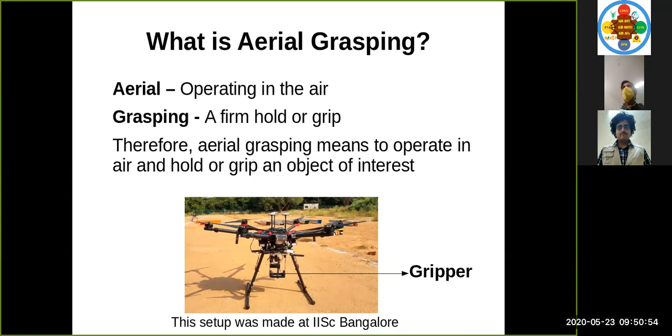Aerial grasping is like a pesticide application in case of agriculture. This is a setup which you can see at the bottom, which was made at IISc Bangalore, where a gripper has been set up below a drone. This setup is used to take up a flying object. It used to fly and pick up a brick and place it at a different place.

So, the need for aerial grasping: it can be applied in many different fields such as agriculture, construction, installation of equipment, search and rescue, inspection and maintenance. In today's session, I'll be focusing more on agriculture because you are all from an agriculture background, but I will also touch upon construction, installation of equipment, search and rescue, inspection and maintenance briefly. I'll focus in detail about agriculture.

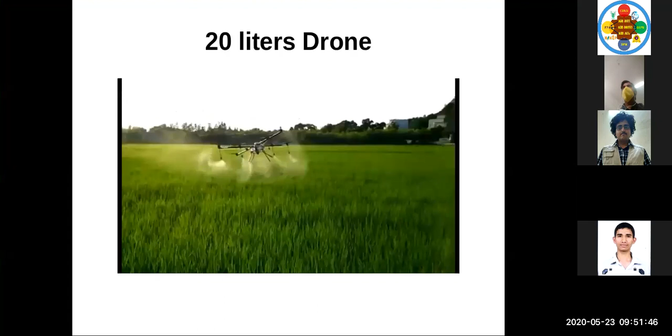So here is a 20-liter capacity drone which carries a 20-liter payload and has a takeoff load of 43 kg. It is flying over a field and it sprays the pesticide.

This is being used by farmers. It will play a very important role in their farming activity. So instead of going and doing it manually, which requires a lot of health hazards to the farmers, this can be done using a drone.

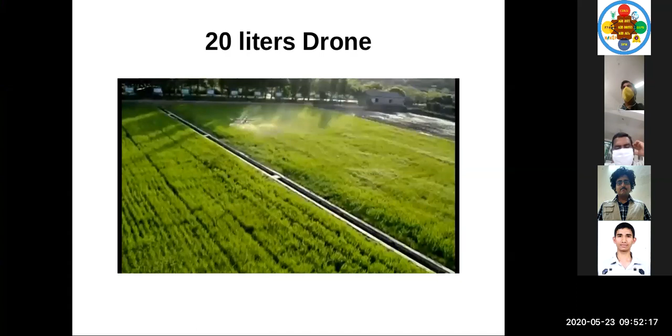Using 20 liters of pesticide, the farmer can go over the field and spray for almost 3 to 4 acres. It can also be efficiently used for more area if planned properly. So this is a pesticide drone which is used for spraying pesticides.

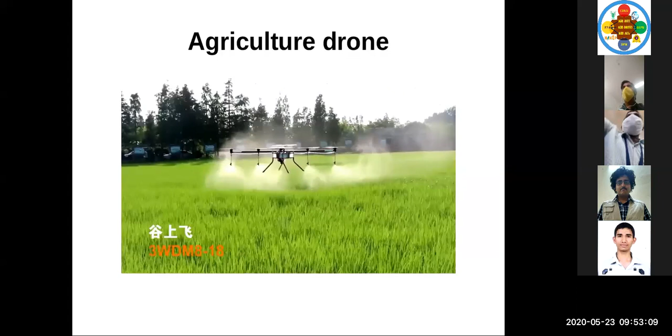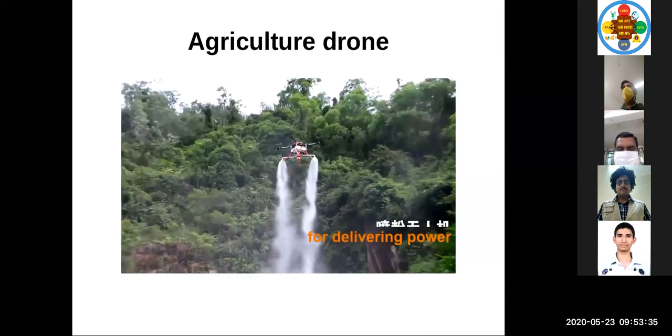You can see the distance it maintains from the crops. This can be done manually, or it can be done using automated purpose. If you are going to go for automated purpose, you need to use GPS and other global positioning system assistance so that you can make it autonomous. You need to map the field where you need to spray the pesticide so that you can spray within that area. You can see the height from which the pesticide is being sprayed.

Here it is being used to cut the weed. It can also be used to cut weeds in the soil. Here a person is operating it. It is being done manually in the tea garden.

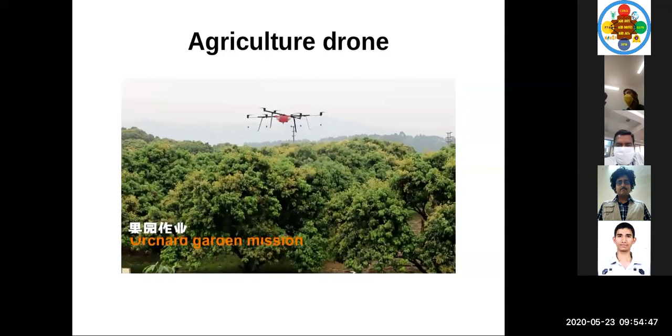So it is not a quadcopter, it's a hexacopter. It has 6 rotating propellers with it. A quadcopter is nothing but which has 4 rotating propellers with it. If you're going to go for agriculture drones, you need to use a hexacopter. It should have 6 rotating propellers so that it is efficient enough to carry more payload and fly for a very long time. Using quadcopters is not advisable.

So in this case, it is grasping a pesticide cylinder. Here it is going in an orchard garden mission. It is spraying pesticides on the trees.

Now we are going to see an automated fruit picker by FF Robotics. Once the fruit is grown, it is picked by using robots. This is not done by drone, it is done by robotic arms. You can see a computer vision program which identifies the apples, and then a robotic arm is used, going and plucking the apples. You can see it twisting and plucking it like how a human does.

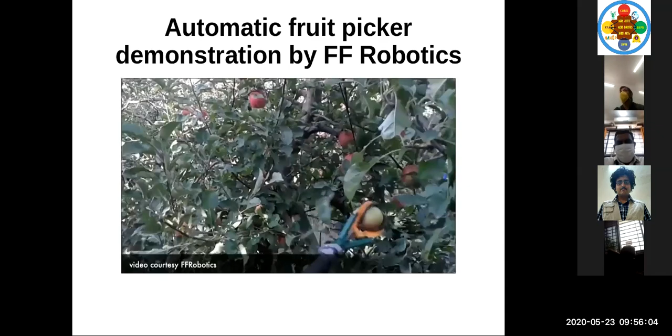Once it is plucked, it is taken into the vehicle so that it can be processed. The person in the video explains that it can be taken to the farm, and it can be taken away from the farm, and it can be taken directly to the customer's place.

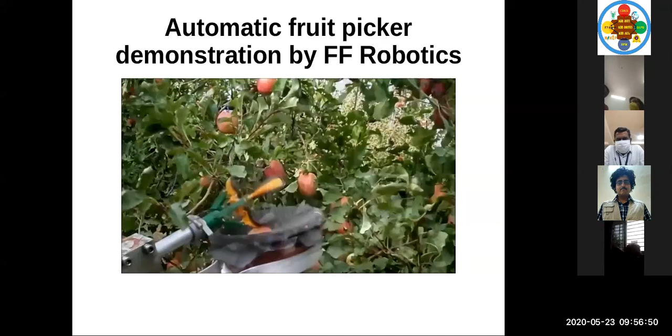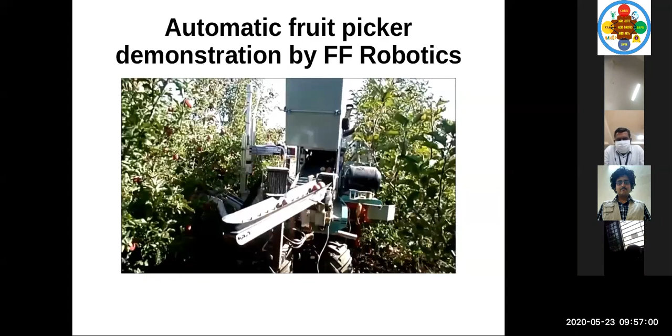So it is a robotic arm which can be fitted to the drone also. It hasn't been done, but you students can focus on this, and you can work on this so that you can use it for plucking apples in the Kashmir region of India. It can also be used to pluck mangoes, even coconuts can also be attempted to be plucked using these kind of grippers attached to the drones.

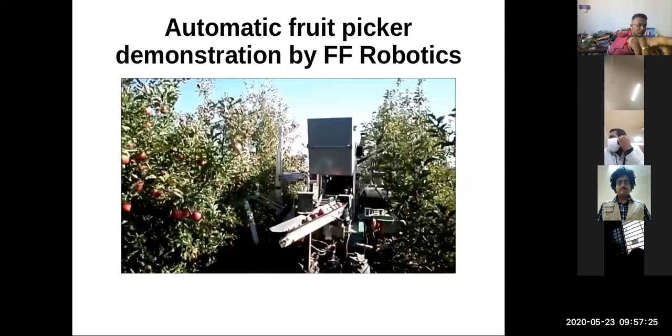Next is DJI. DJI is a company which manufactures drones. This DJI drone, the MG-1P series agriculture drone, can be used effectively in complex environments. It does work efficiently. It can fly up to 30 minutes in the air.

You can see the map in the user operator window. It follows a trajectory which has been given to it before. It can cover up to 6 hectares per hour. If there is an obstacle, it avoids the obstacle and goes around it. It can also be used in nighttime vision mission applications.

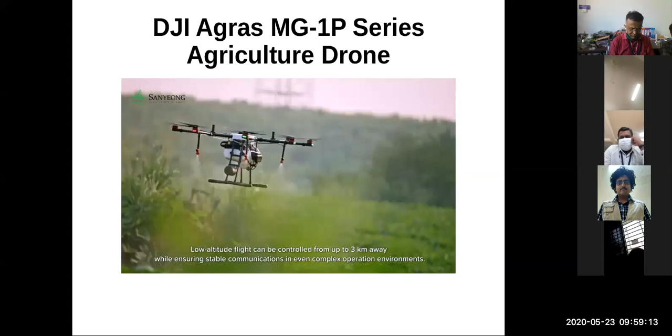The waypoints are set, and then it follows the waypoints so that it goes within the place where the crops are there, and then sprays the pesticides. It has a control range of around 3 kilometers away from where the person controls it. It can be taken in a car, and it can be folded.

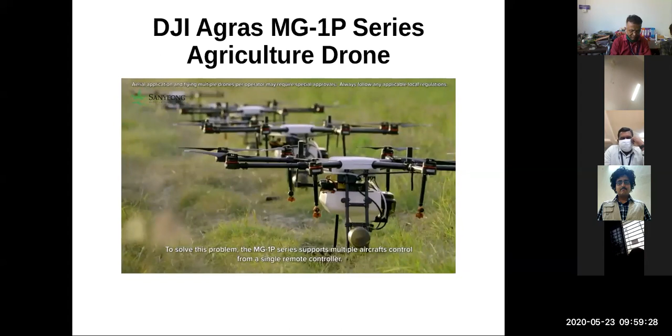Around 5 to 6 DJI drones can be used at the same time using a single pilot. The pilot is the person who operates the drone. A single person can fly 5 drones at the same time and can cover the entire area within a very short period of time. This saves a lot of time.

If the terrain is not smooth, it can find out the terrain and it maintains the height from the terrain. It is IP67 grade material so that it can be cleaned and it is dust proof. Here it is spraying the pesticide.

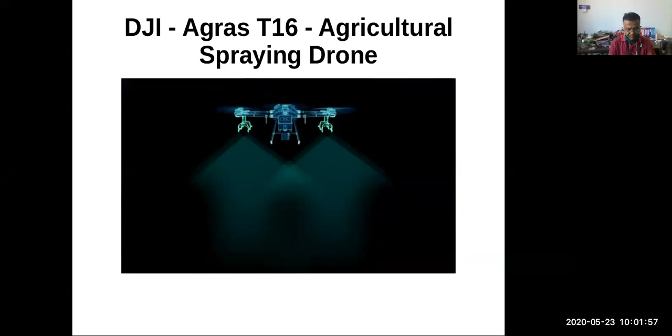It is similar to the previous one, but it has 6 rotors. As I said earlier, these 6 rotors help in giving proper thrust to the flight. It covers an area of 10 hectares per hour.

There is another drone called the Wonder Drone from DJI. These are being used by people in Malaysia for spraying pesticides.

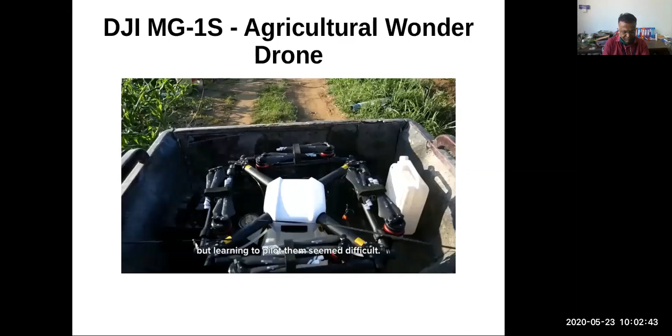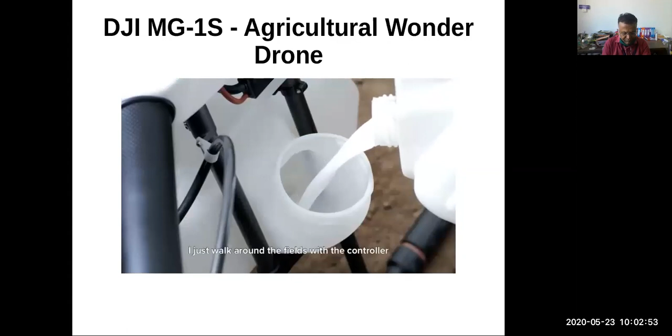Drones are mainly used for spraying pesticides in betel nut fields and other fields. Here they are pouring the pesticide inside the drone. The person goes and maps the entire area, and then the data is given to the controller, and then it starts flying.

It can cover up to 60 to 70 hectares per day. Even if the terrain varies, it will maintain the distance from the spraying area and height, and then it will spray. This is very important.

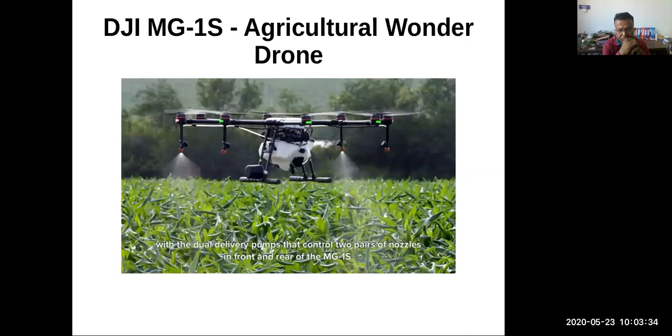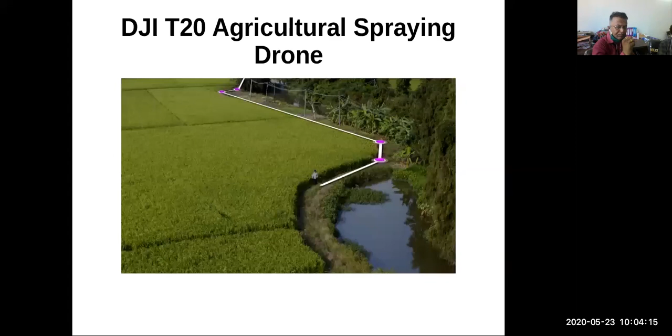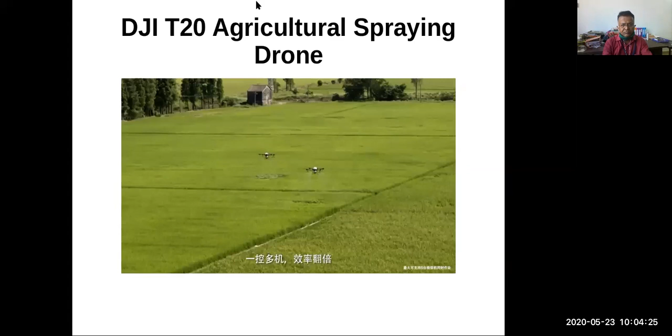First, the person has to walk and give the boundary for the field. Once the boundary is given, the person can move away, and then start flying the drone.

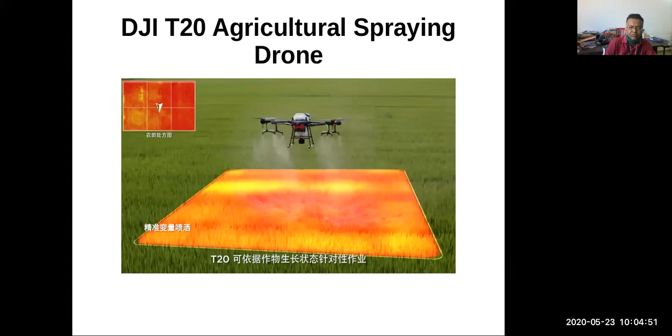These drones are washable. It is IP67, where IP means ingress protection. The 6 and 7 stand for the grade of dust and water ingress into the drone.

This is an agri-copter made by an Indian company called General Aeronautics. It is incubated at the Indian Institute of Science, Bangalore.

They are using it to spray in the paddy field. So this is a made-in-India drone which can be used for agriculture purposes.

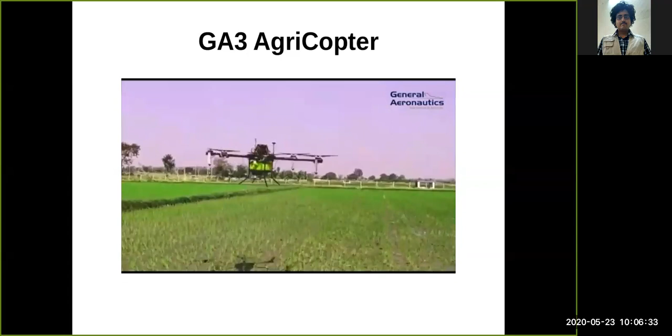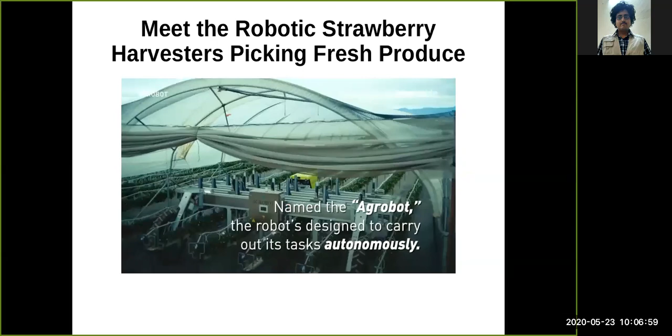This is not related to aerial robotics, but it is for harvesting strawberries. Here the strawberries are being harvested, and you can see the fresh strawberries being taken from the farm using robots, and they are being collected in a box.

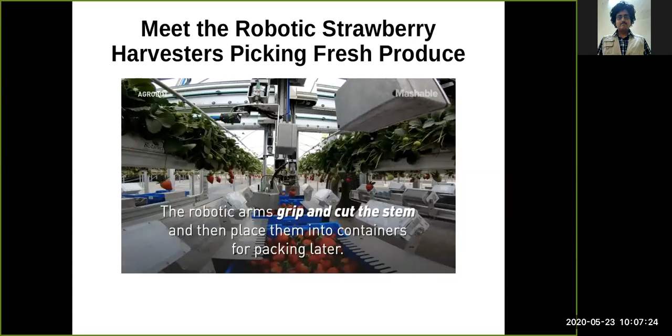This can be combined with aerial robotics, that is unmanned aerial vehicles, and can be used for collecting other small fruits like grapes and other things. These kinds of robots are very useful for harvesting.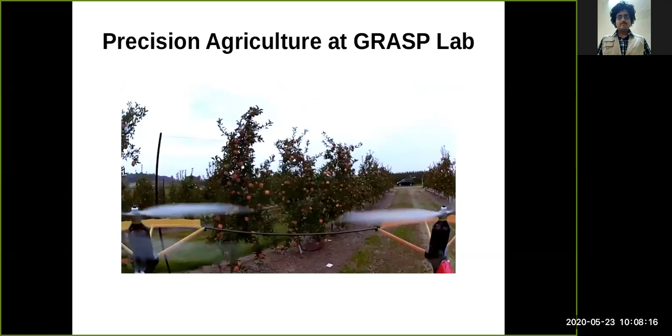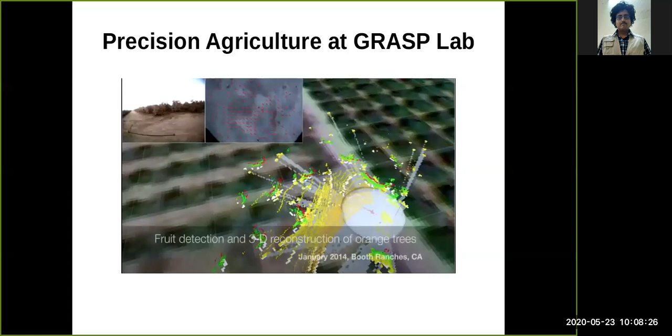So a drone in the orchard field is going to go inside. You can see the apples and oranges being grown over there, and the drone is going to map the entire arena. The fruit detection is happening now.

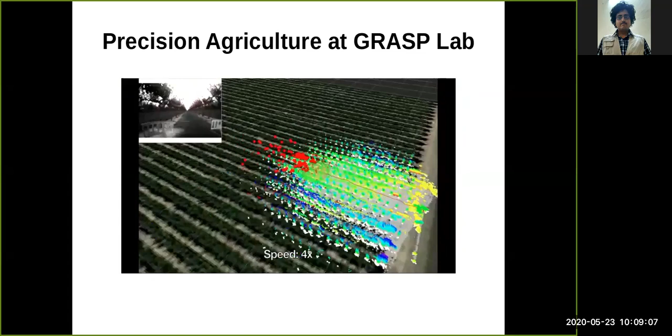It moves in the gaps and finds the fruits, and the 3D reconstruction of grapevines is happening. The data from GPS, LIDAR, and inertial sensors are utilized to map the farm. The things you're seeing in red color are the fruits.

You need to use LIDAR for estimating the height, and a thermal camera to find the heat, a GPS and inertial measurement system to find out where the robot is, and then you need to fly and find out where the tree is.

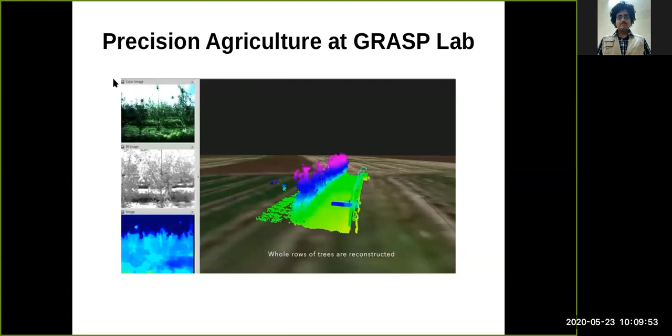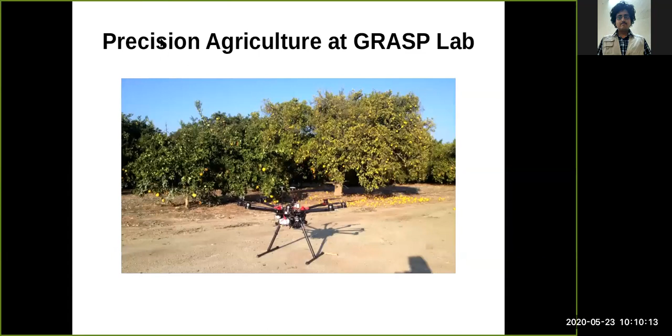So it is now mapping the tree, and the 3D thermal map of the entire area is made. This is a simulation image where the drone flies.

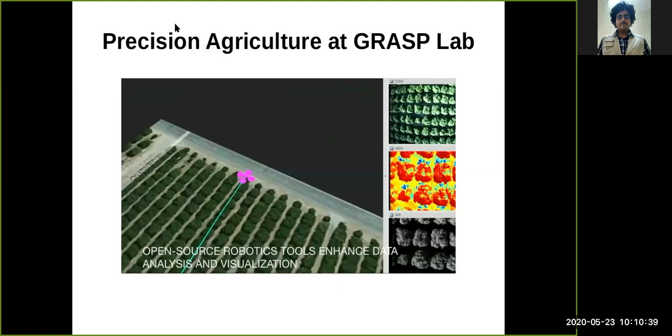Now they are going to count the number of fruits, which is very important. You can see the black screen on the right hand side where you can find the fruits shown in white color.

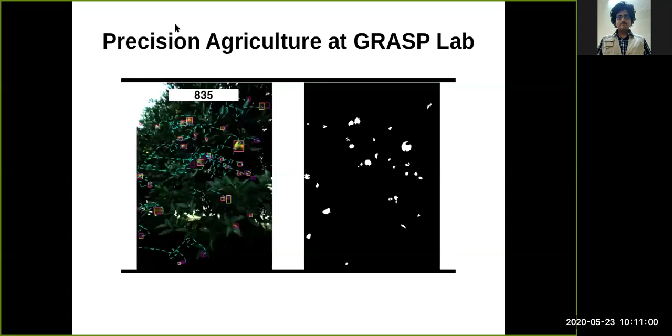If there is sunlight, counting the fruits becomes a challenge due to the illumination of the fruits. So they are going to use an LED array and camera synchronized strobe.

So the red apples are going to be tracked now. You can see how many apples were there. There are around 835 apples at the bottom.

Now the green apple is going to be tracked. You can find the number at the bottom.

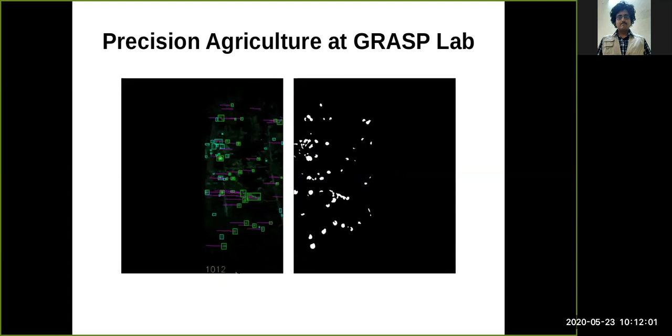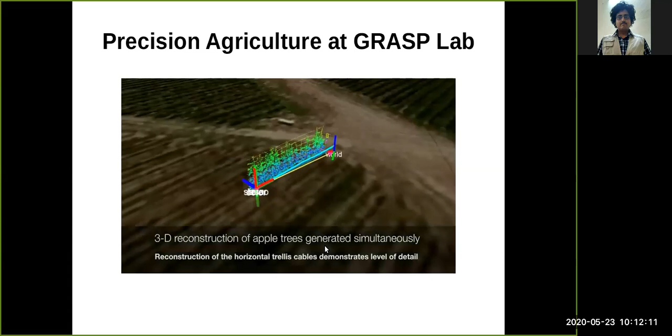The 3D reconstruction of the apple trees is generated simultaneously with the data obtained from the drone. So this is one row of the field.

The next video is about a 16-liter capacity drone, which is being shown in this video.

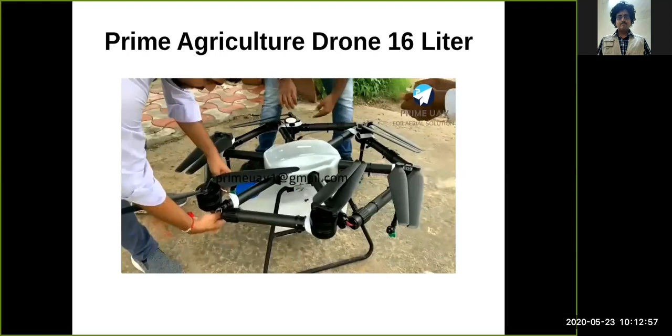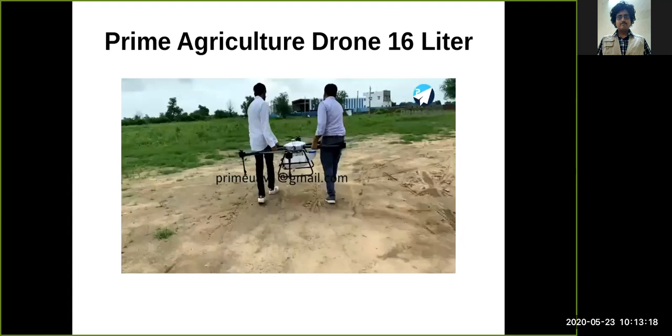This is also made in India. You can see the drone being flexible; it's foldable basically. The power supply is being given to the drone.

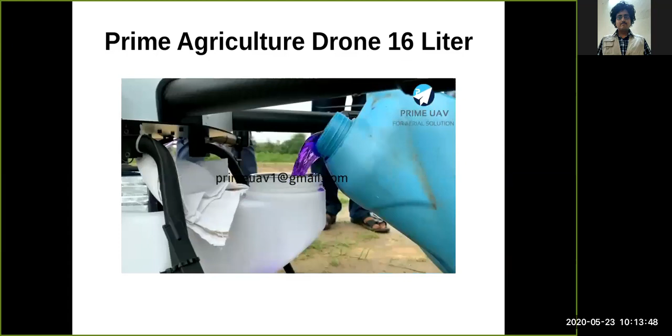Now the handheld device is being controlled, ready to be controlled. Now the pesticide is being poured into the drone, which is going to be sprayed from the air when it flies. You can see the pesticide coming out at the bottom.

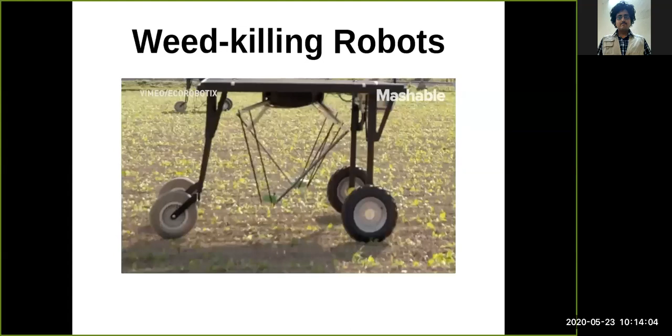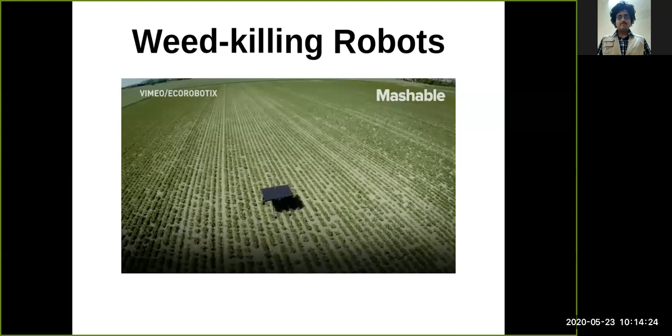Next, a robot. This is a mobile robot used for weed killing. It identifies the weed and kills it, helping farmers identify and kill weeds. This is powered by solar, and hence it can operate for around 12 hours. It is easy to deploy on the field.

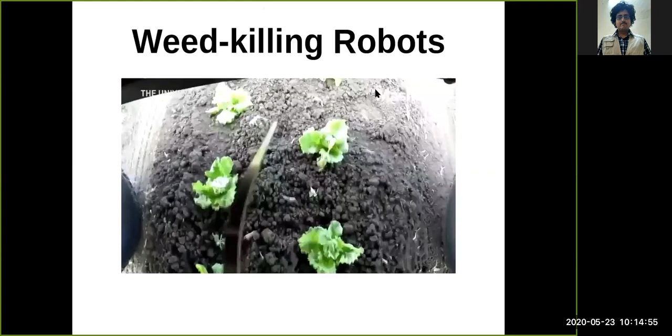I'll be showing a few of my works at the end of this video.

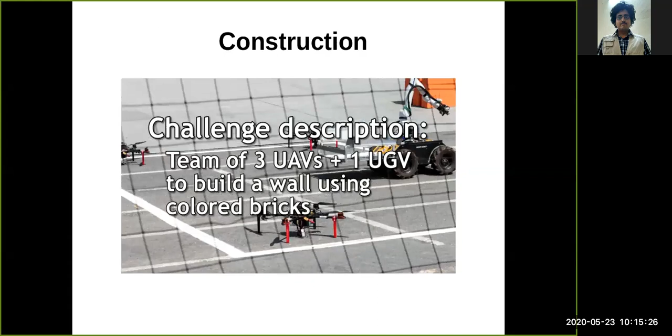So this is the application being used for construction. This is not related to agriculture, but I'll quickly go through these. So far we have seen agriculture. This kind of grippers can be used for construction purposes, and you can get an idea from this so that you can apply it in the field of agriculture. That is why I'm showing this.

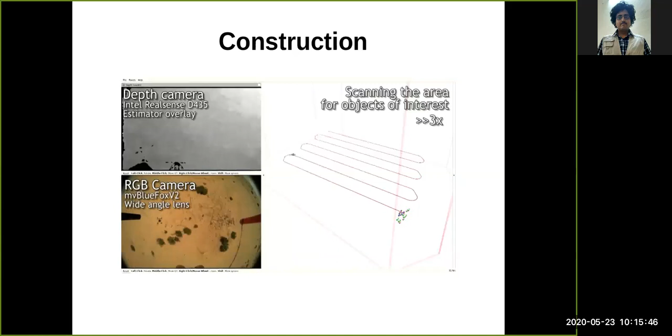It is scanning the area basically, and once the bricks are identified, it goes there and picks up the bricks and comes and places it at the building site. There is a camera on the drone which identifies the brick. This is a mock-up brick. It identifies it and comes and places it at the place.

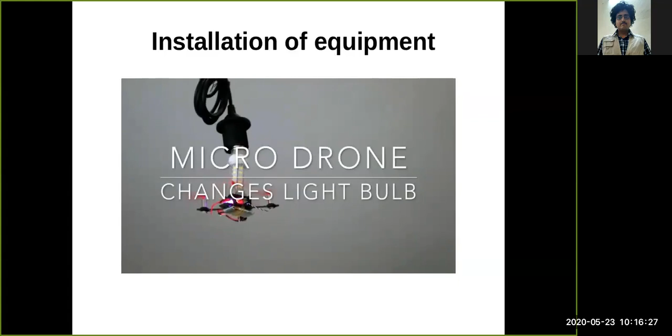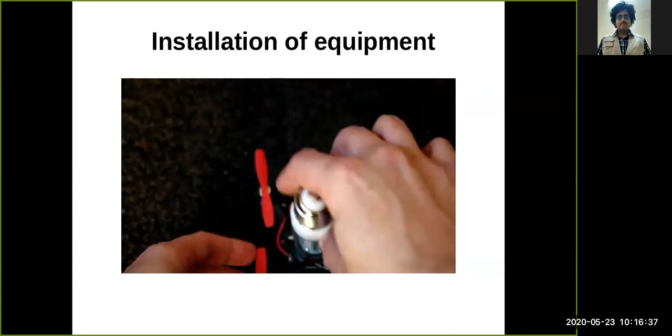So for installation of equipment, for example, a drone can be used. In houses, if you want to install a bulb at a high-rise building or in the ceiling, a human has to climb up and then use it. Instead, a drone can be used for putting the bulb.

This kind of application can also be used for picking fruits from trees. You can attach a gripper on top of the drone instead of attaching a bulb, and then you can go up and catch the fruit, and then come down.

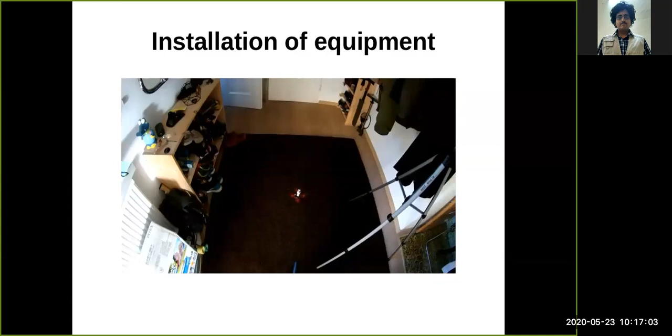Amazon has made home delivery possible by using drones. For inspection purposes, we are using drones, that is for inspection of oil rigs.

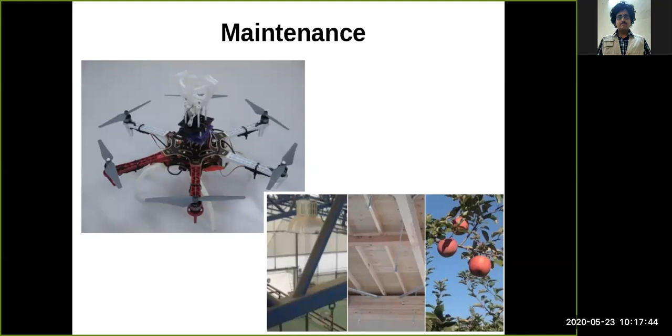For maintenance purposes, you can see the fruits. There's a drone with a gripper on top of it, and with that gripper it can be used to pluck the fruits. So some interesting work in the area of aerial grasping can be seen now.

So it is a gripper with a cable-driven mechanism which can be used for holding on to objects. This is a gripper which holds objects of different sizes and shapes.

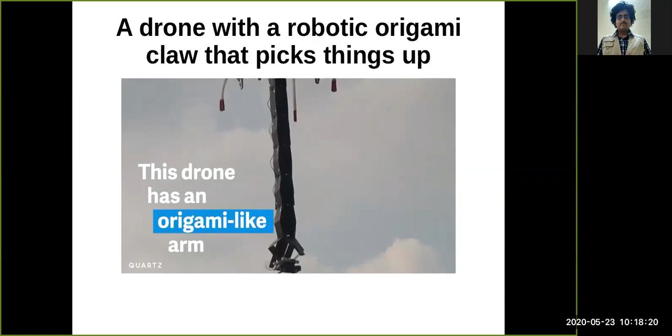So this kind of drone is expandable with grippers of expandable nature. These grippers expand out of the drone after taking off, and then it goes down and picks up the object of interest, and then comes down.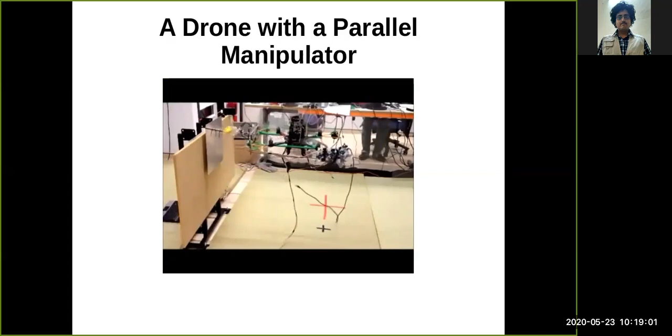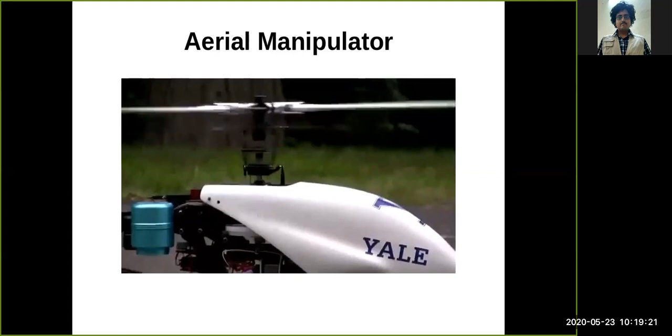Next is an aerial manipulator. This is a helicopter kind of drone, which can also be used in agriculture to carry pesticides. It can be used in hilly areas where drone GPS cannot be accessed very easily. So helicopters can be used in those kind of areas.

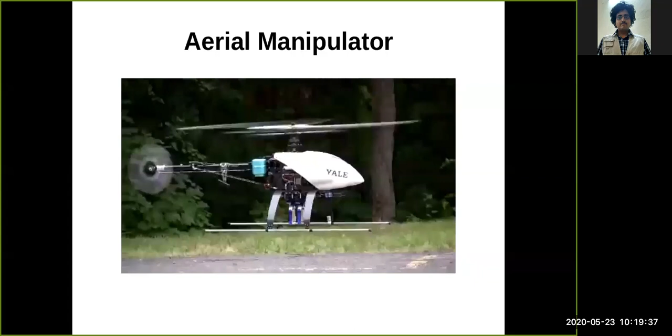Now we'll be seeing a virtual reality-based teleoperation with tactile feedback. If you move the arm, the robot also moves the arm. This kind of thing can be attached to the drone, and then you can fly the drone and try to pick something up using your own hand. The drone will pick it up with its own hand. So that kind of thing can be done.

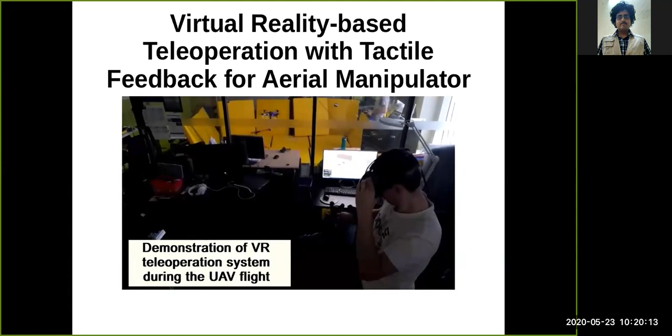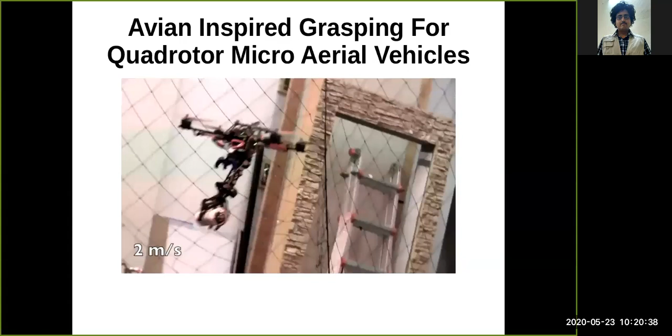Taking inspiration for aerial grasping is nature. If you see how a bird catches a fish, the similar thing can be applied in catching an object which is flying in air. This is called bio-inspiration. If you are struggling to get an idea, you can take inspiration from nature.

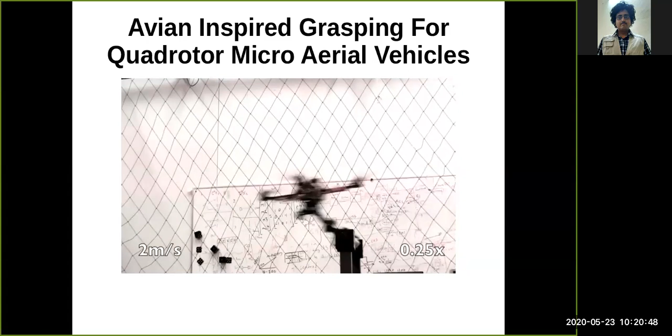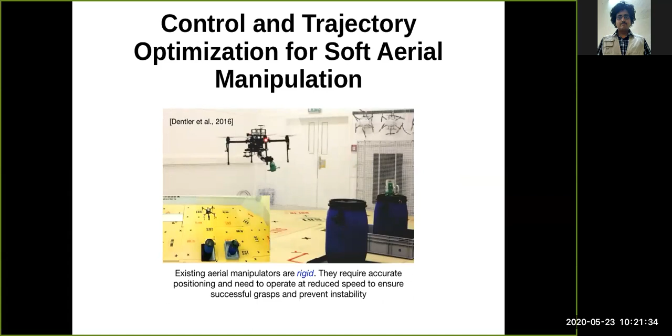Now we will be seeing about a soft aerial manipulator, which will be very useful for catching a differently oriented object and an object of different shape. Normal grippers will be used to capture only rigid objects. This gripper can be used for capturing objects which are flexible in nature. You can see the gripper which is flexible in nature and it is picking it up.

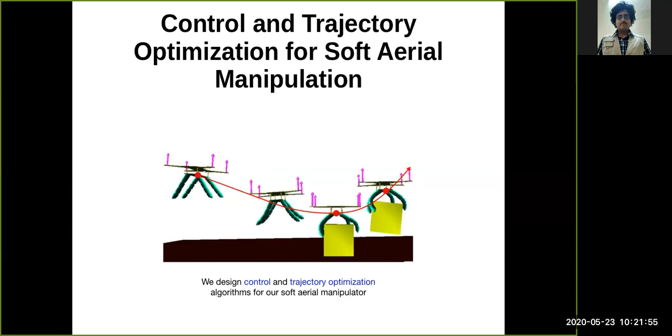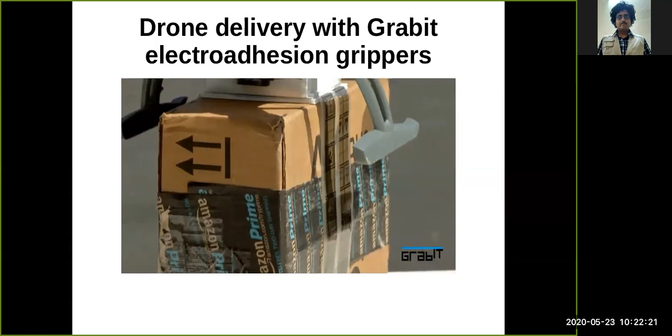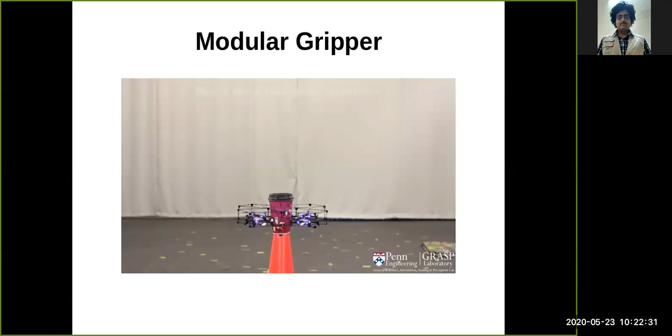Then a modular gripper. A modular gripper is nothing but 4 drones being used to pick up an object. Here you can see a cup being lifted by 4 drones, and then it is being utilized to take it to another place.

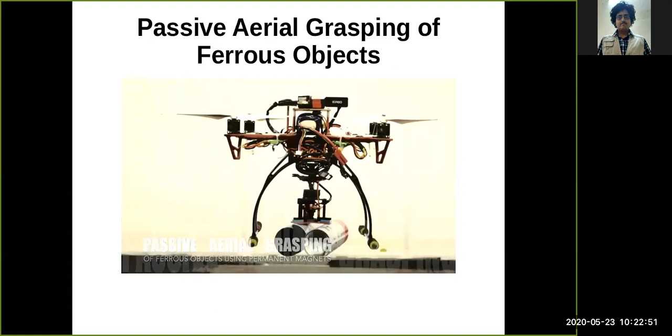So, passive aerial grasping of ferrous objects. If the object is ferrous in nature, then this kind of magnetic grippers can be used.

So first you need to make a conceptual design, then go for 3D printing, then interface it with a microcontroller, then mount it on the drone with the microcontroller and give the power supply from the drone. A reference book for aerial grasping is Aerial Robotic Manipulation, Research, Development and Applications by Springer.